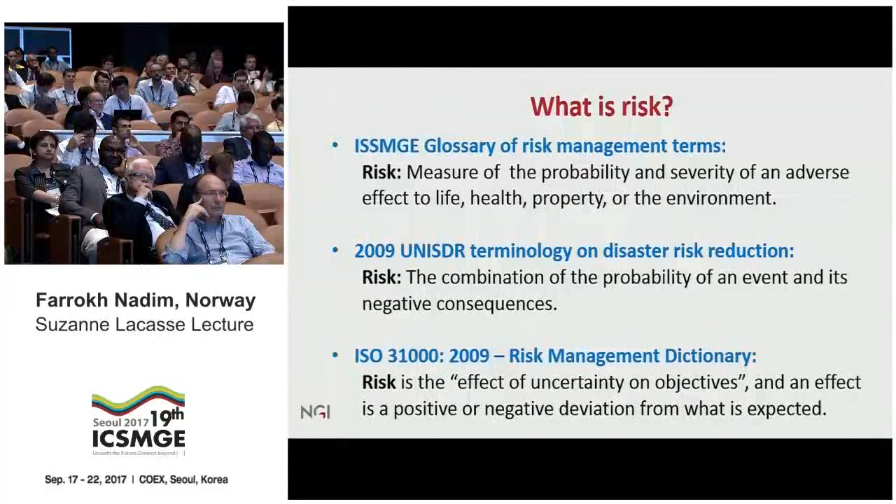What is risk? Well, risk is one of those abstract terms that many disciplines feel ownership over, so it has many different definitions in many different disciplines.

Our international society, ISSMGE, has a glossary of risk management terms, which defines risk as a measure of the probability and severity of an adverse effect to life, health, property, or environment.

In 2009, the United Nations Office for Disaster Risk Reduction came up with terminology for disaster risk reduction. In their terminology, risk is defined as a combination of the probability of an event and its negative consequences.

So it's very similar to the ISSMGE definition. But in the same year, ISO published a glossary of risk management terms, and they came up with a very interesting and kind of cryptic definition of risk.

In ISO's definition, risk is the effect of uncertainty on objectives, and an effect could be positive or negative—it's just a deviation from what you expect.

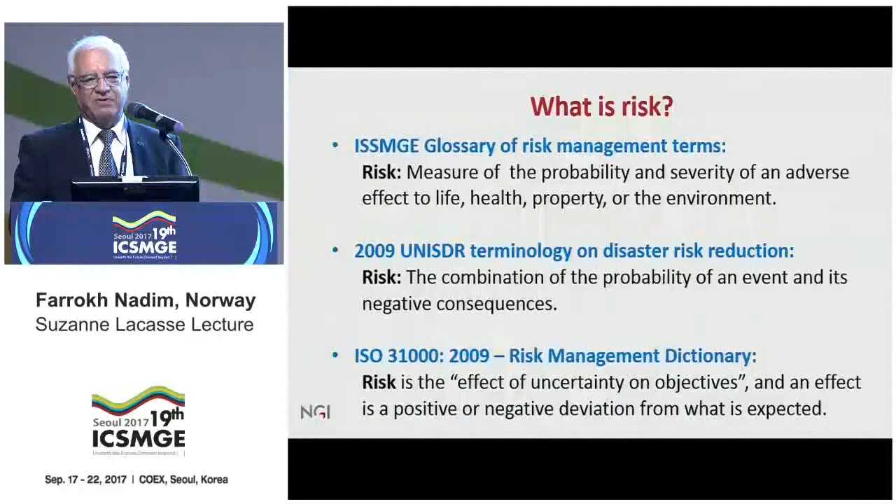I think this is a very interesting definition, and it drives home the point that if you have no uncertainty, then there's no point talking about risk. Risk is closely associated with uncertainty.

Dealing with uncertainty is kind of a day-to-day work of a geotechnical engineer. In any sort of geotechnical or geological assessment, one has to deal with uncertainty, either implicitly or explicitly.

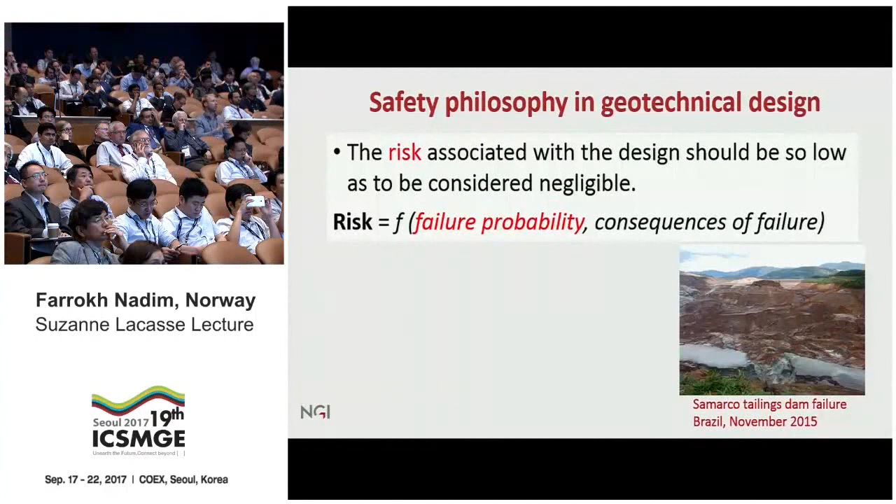When we're doing geotechnical design, no matter what design approach we use, the safety philosophy is that the risks associated with the design should be so low as to be considered negligible. As engineers, we look at risk as a function of a failure probability and the consequences of failure. So to achieve a robust and safe design, we must ensure that the probability of failure of the component or the structural system we're designing is tolerably low under the applied loads.

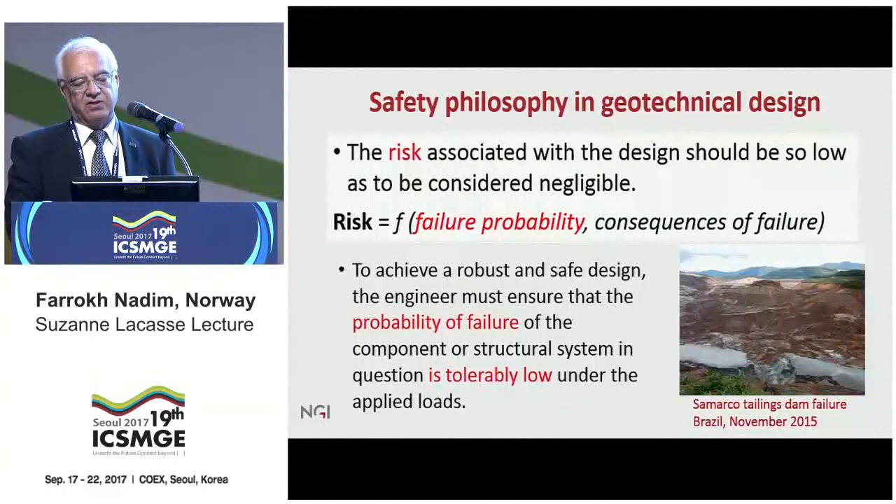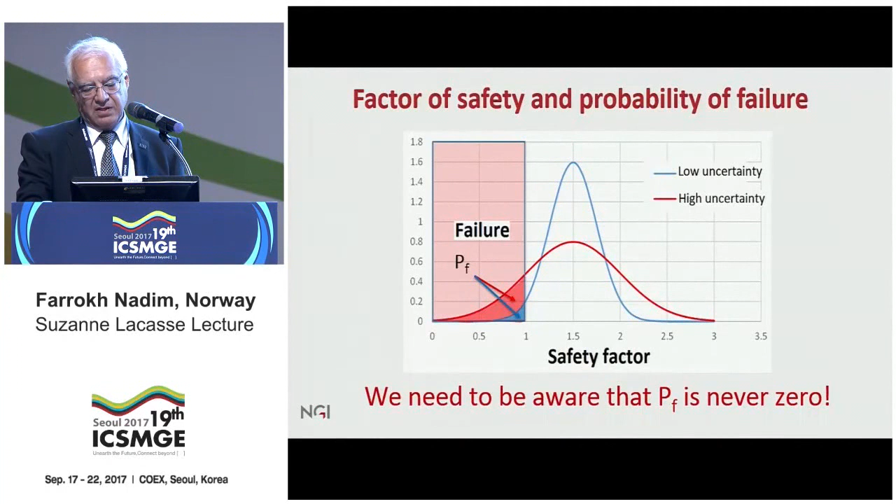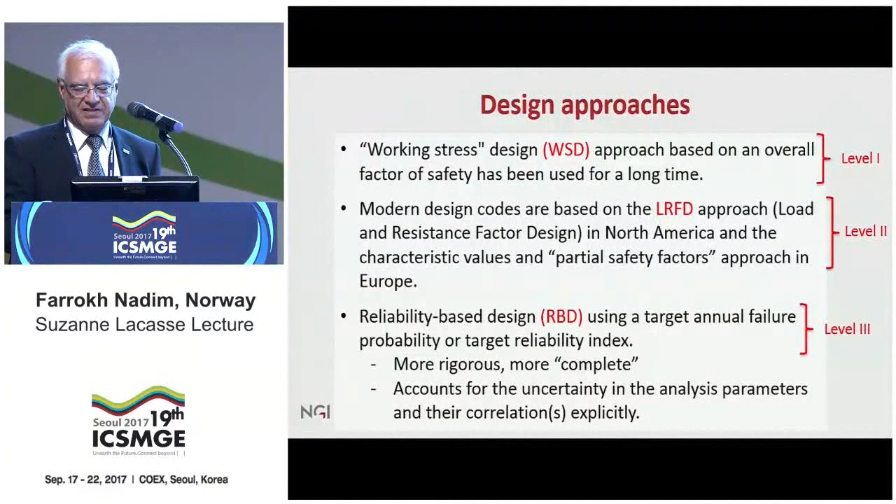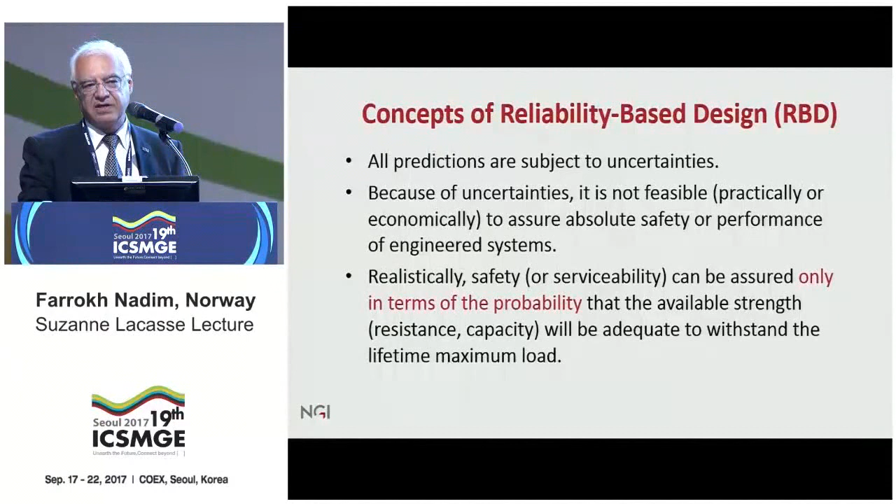The whole concept is that, as we all know, all predictions are subject to uncertainties. And because of these uncertainties, it's not practical or economical to assure absolute safety. So when we talk about safety or serviceability, we can only talk about these concepts in probabilistic terms.

So the objective of reliability-based design is to try to keep our probability of failure, which is, in simplified terms, the probability of resistance being less than the load, to be less than the target value. The design risk is quantified by this target value and failure probability, but the main challenge is that we should make a conscious choice of this target failure probability.

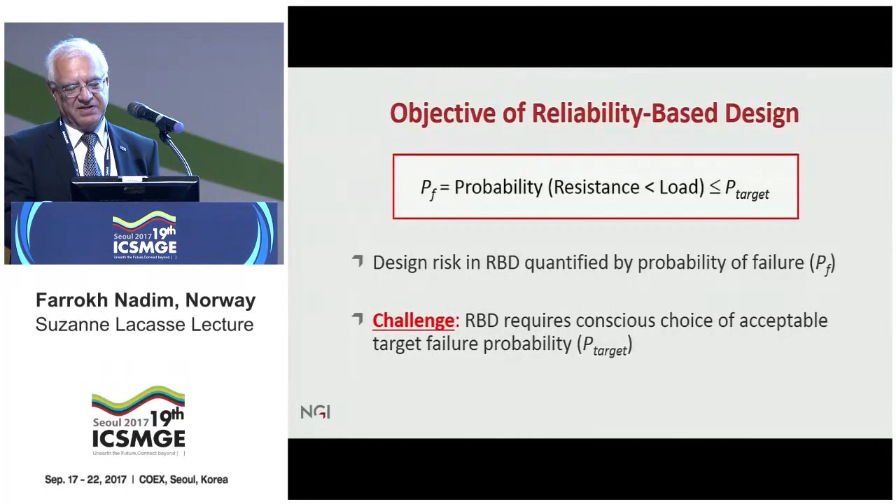Most people don't want to admit that there's any probability of failure related to their design. But if you want to do RBD, then you have to set a target value for your design.

When we're doing deterministic design, basically what we do is look at all the available soil data and then choose a characteristic soil property, characteristic soil profile. We look at all the loads, pick up characteristic loads, one specific number. Our geometry is deterministic. We feed all this information into a model, and out of the model comes a safety factor. We compare it with an acceptable safety factor.

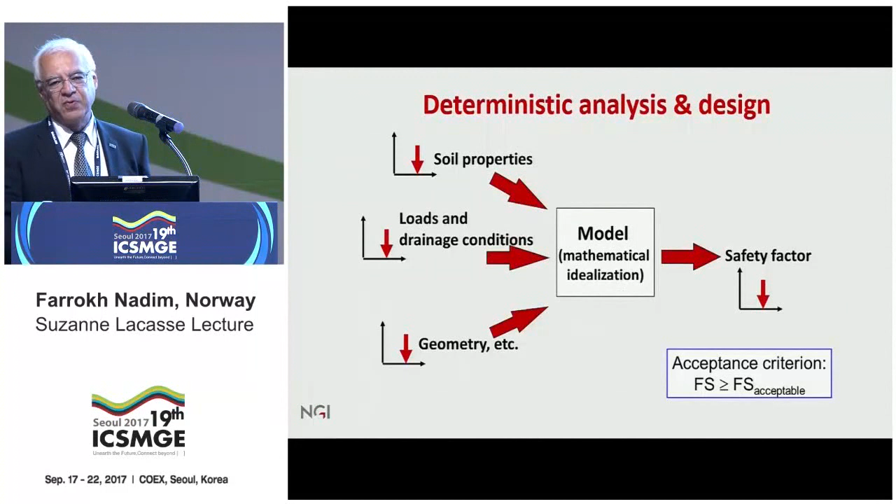If what we've calculated is greater than the acceptable safety factor, then we have a good design. So if the acceptable safety factor is 2 and you calculate 2.01, you're a hero, and if you calculate 1.99, you get fired.

A probabilistic approach is basically that you go through the same steps, but instead of picking up a characteristic profile or characteristic numbers, you describe the uncertainty in all your inputs in the form of probability distribution functions, or at least in terms of means and standard deviations.

Then you feed all these things into a model, but your model, you realize, is an idealization, a mathematical idealization, so the model also has some uncertainty in it. Out of your model comes a distribution function of a safety margin or a safety factor. And then from that, you estimate the probability of failure or the reliability index. Your acceptance criterion is that your reliability index is greater than the acceptable value, or your failure probability is less than the tolerable value.

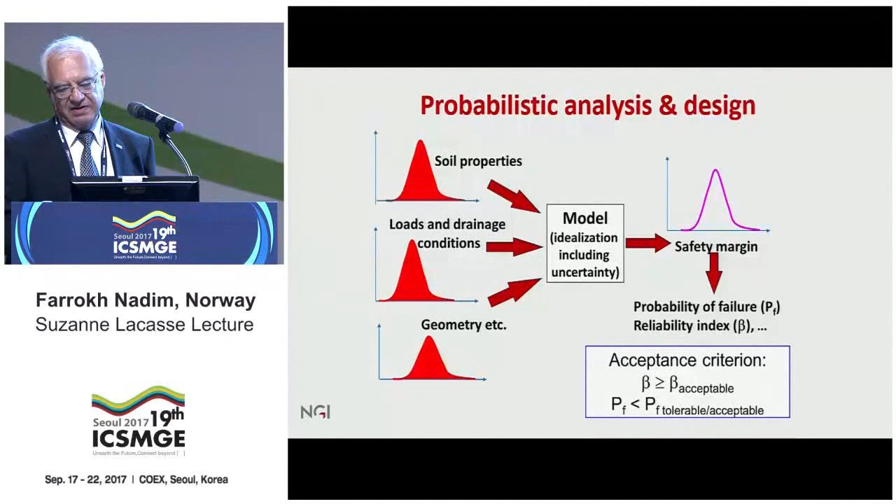So what should we do in terms of calculation of failure probability? Well, the first step is that we have to establish a precise definition of failure. Once you've done that, then you can apply a number of methods for calculating failure probability. Maybe the simplest one is the first order second moment approach, which gives you the mean and standard deviation of whatever performance measure you're interested in. Then you make an additional assumption, and from that mean and standard deviation, estimate your failure probability.

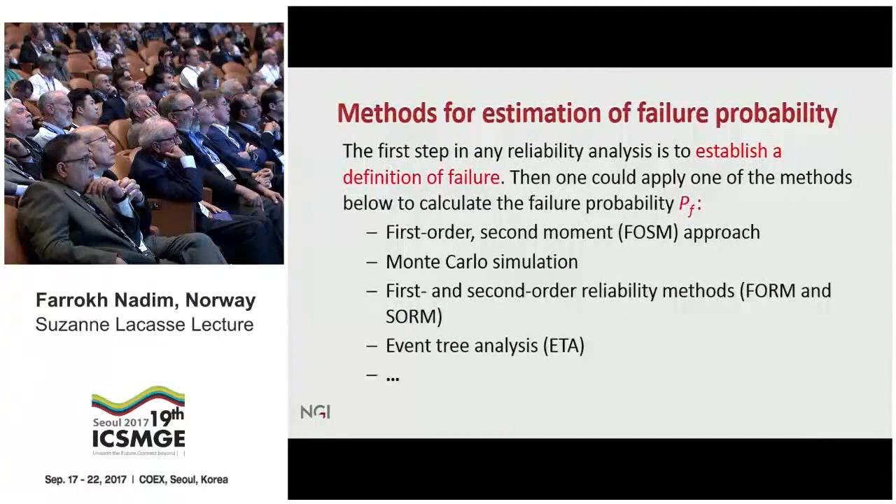Monte Carlo simulation is a sort of brute force approach that can be applied to any type of problem where you have a mechanical model for it. But it does have this disadvantage: if you're dealing with a good, robust design, you often have very small failure probabilities. So if you're dealing with a failure probability on the order of 10 to the minus 4, 10 to the minus 5, you have to do hundreds of thousands or even millions of simulations to get a good statistic to establish that failure probability.

That's why the first and second order reliability methods, so-called FORM and SORM, are becoming more and more popular. They're approximations that give you a relatively precise estimate of low probabilities. They're relatively easy to use, and they give you a lot of additional information along the way, which in many cases is more valuable than the calculated failure probability itself.

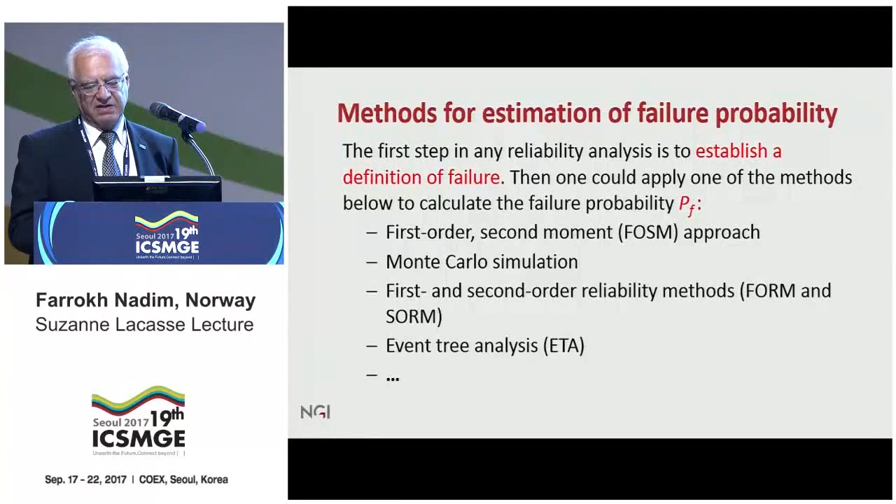In some classes of problems, we really cannot develop a precise mechanical model of the problem and assess the failure. But we can still estimate the failure probabilities through judgment and discussion with experts, and I'll give you one example where an event tree analysis approach is used. It's very popular for dam risk analysis, especially for existing dams, for tunnel risk analysis, and all types of major infrastructure you might be interested in.

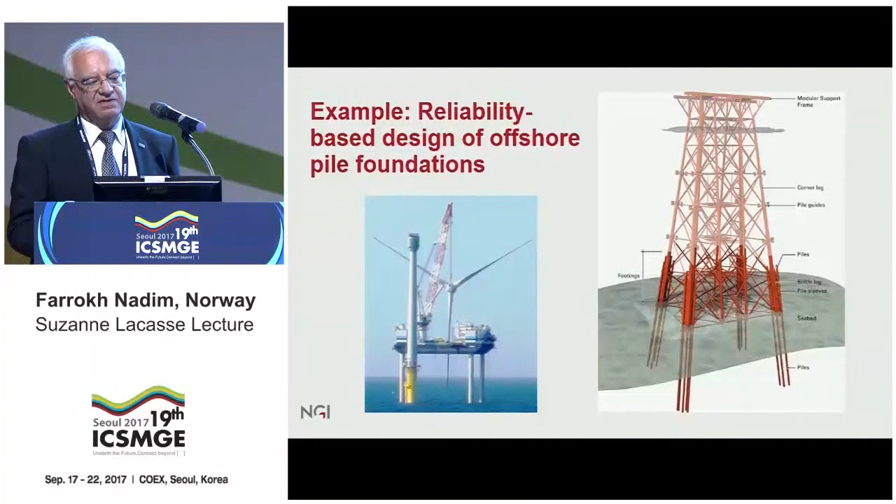So I'll give you a couple of examples of application of reliability-based design for foundations. The first example is design of offshore pile foundations. The motivation for this type of study is that recently the API and ISO guidelines for offshore design allow for the use of newer CPT-based pile capacity design methods.

And these newer methods haven't really been tested in practice over many years. So API and ISO do not tell you what sort of partial safety factor you should use when you use these methods. The only thing they say is that it's up to the engineer to select an appropriate safety factor when using these CPT-based methods. Now, this is not very helpful for a design engineer.

So in practice, you can choose to either be conservative and use a very high partial safety factor when using these methods, or you can try to assess the safety level by calculating the annual failure probability and comparing that with the goal set in these codes.

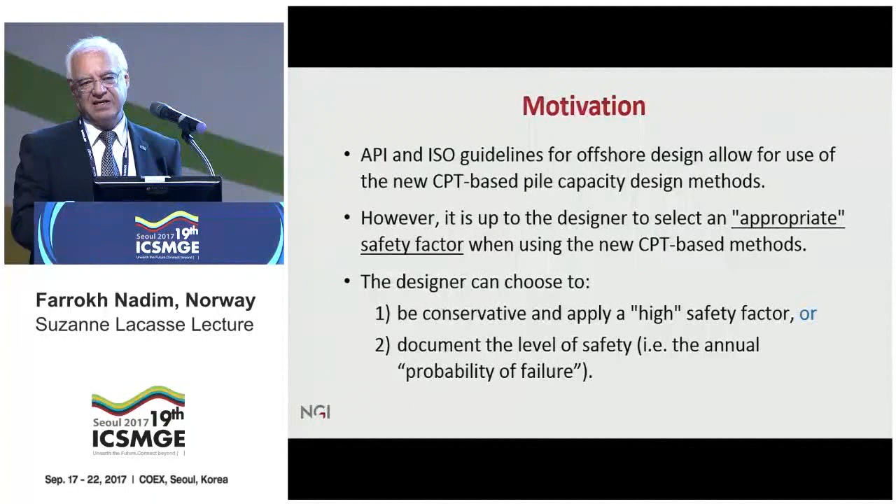We did three studies for an oil company in Norway for three different jackets that were being designed. All three jackets were in almost 100-meter water depth. The piles were similar: each pile was about 2.5 meters in diameter, and the wall thickness varied between 90 and 100 millimeters. The API and ISO codes allow for four CPT-based design methods: the Imperial College method, NGI method, UWA method, and Fugro method.

Now, if one were using the API method, then one could have used a resistance factor of 1.3. But the owner of these platforms, the operator, to make sure they have a safe design, required a resistance factor of 1.5. And that resulted in pile lengths that were, in some cases, impossible to drive through that soil profile.

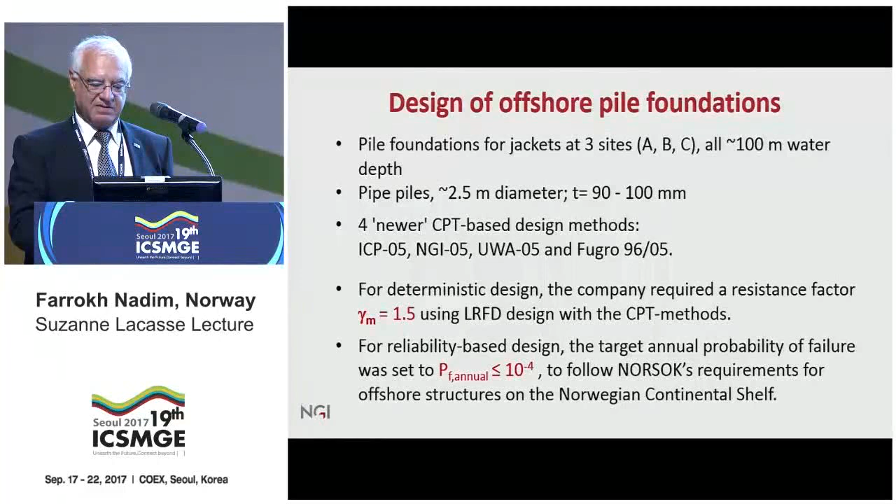So then they asked NGI to do a reliability-based assessment and find what pile length gives us an annual failure probability less than 10 to the minus 4. That value, annual failure probability less than 10 to the minus 4, is basically the Norwegian law — that's a requirement for offshore structures on the Norwegian continental shelf.

If one were doing an LRFD design, then we'd have to choose a characteristic value and characteristic load, and then apply appropriate safety factors to them and make sure that the load times the partial safety factor for load is less than the characteristic capacity divided by the partial resistance factor.

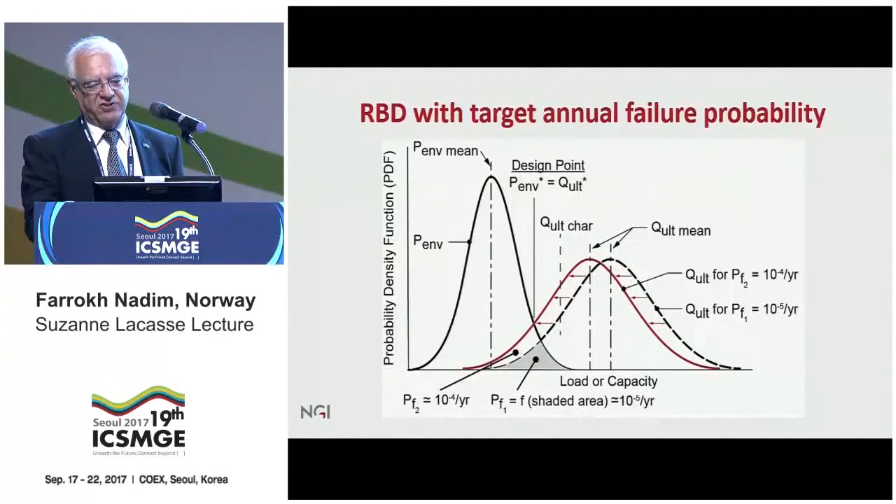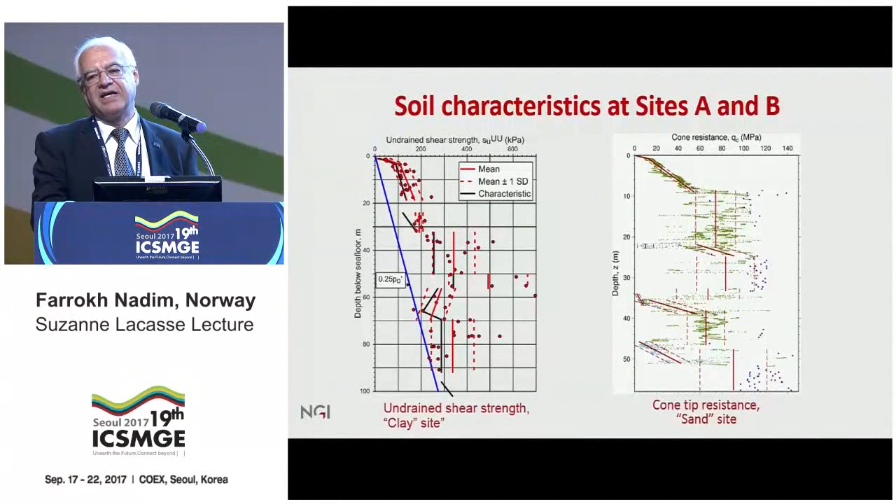So it's a heavily over-consolidated clay at the top layers at least. The one on the right shows the cone penetration resistance for the sand sites. And again, you have the mean value plus or minus one standard deviation. Notice that in some of these places you have these dots here—at these locations, the resistance was so high that the cone couldn't penetrate more, so the actual resistance is more than what's shown on that plot.

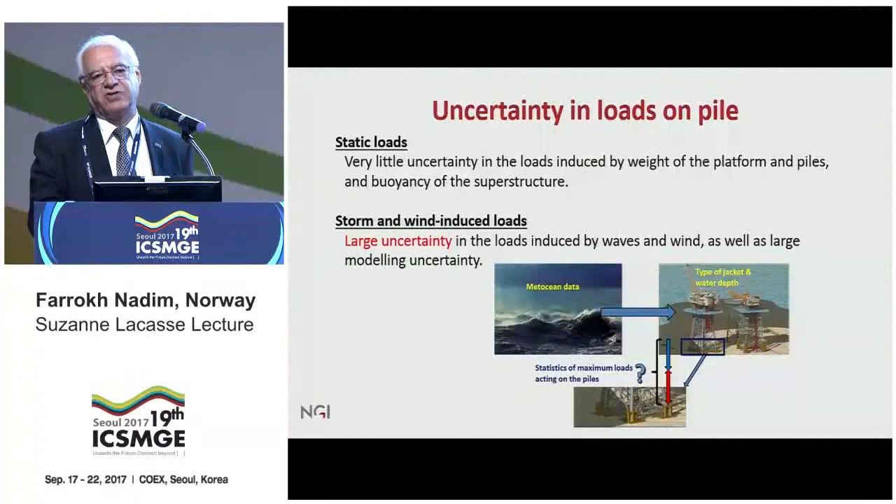But it's not just the uncertainty in the capacity which is governing this thing. When you're designing an offshore foundation, there's a very large uncertainty in the environmental loads. So it was important for us to get a good grip on the uncertainty in the environmental loads that come into the picture too. And for that, it forced us to have a very close dialogue with the structural engineers and the hydrodynamic experts.

But just to make a long story short, by doing this reliability-based design with the target of having the probability of failure less than 10 to the minus 4, in the clay sites, the pile lengths were reduced from 90 meters to 75 meters. In the sand sites, they were reduced from 51 to 27 meters. And in the mixed site, from 45 to 36 meters. So this represented huge savings—close to maybe millions of dollars at each of these locations.

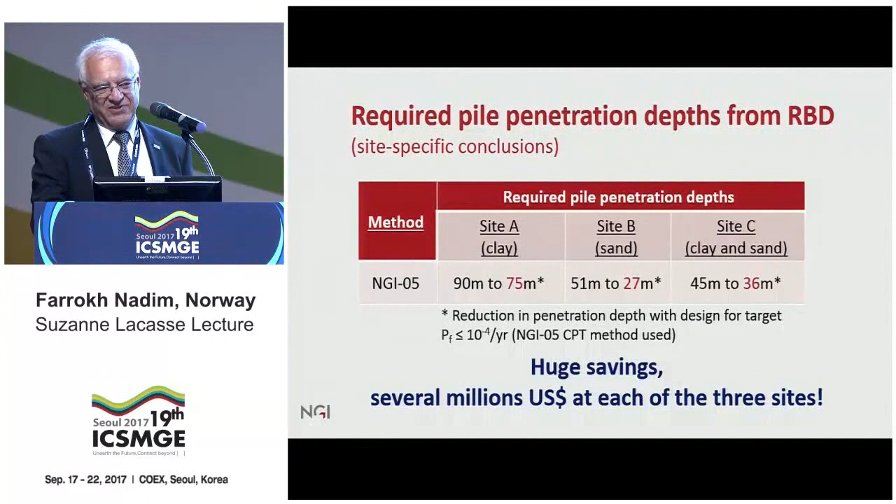Of course, our client was very happy to accept these results because it meant huge savings for him. But if we were coming up with the opposite conclusion, if the reliability-based design was giving us pile lengths that were longer than the deterministic design, I'm pretty sure they would have ignored our calculations completely and just said, okay, we're happy with the deterministic design.

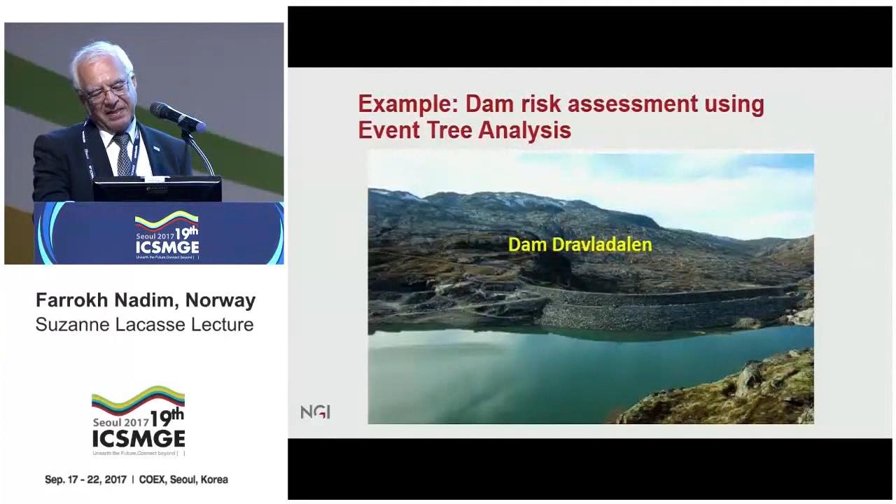Second example I'm going to give you is from a dam risk assessment using event tree analysis. The dam is actually only 29 meters, not a very large dam. It's a rock-fill dam in western Norway called Dravladalen, so it's not very easy to pronounce either. But it's a very interesting case study.

So in terms of stability and issues with stability of the dam under different loading conditions, this is a very robust and safe dam.

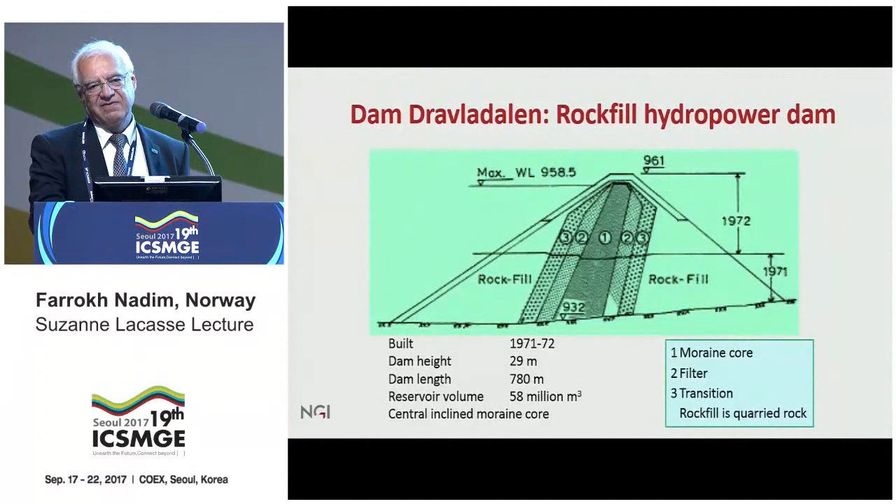But when we did the reliability analysis of this dam in 1996, the reason the owners of the dam wanted to do it was that there was a lot of interest in dam risk analysis in those days. They wanted to acquire knowledge about what additional information, what sort of added value can be gained by doing this sort of dam risk analysis.

Then we redid this same dam in 2016, because for about 15 years there was absolutely no interest in this. But again, in the last couple of years, there's been a lot of interest by dam owners in Norway and also in US and Canada and other places in doing dam risk analysis.

The reason they did it in 2016 was this renewed interest, but in the meanwhile, from '96 to 2016, they had done a number of rehabilitations on these dams, so they wanted to quantify the effect of these rehabilitations. The dam owner also wanted to compare the reliability of the dam with international standards for other large dams in the world.

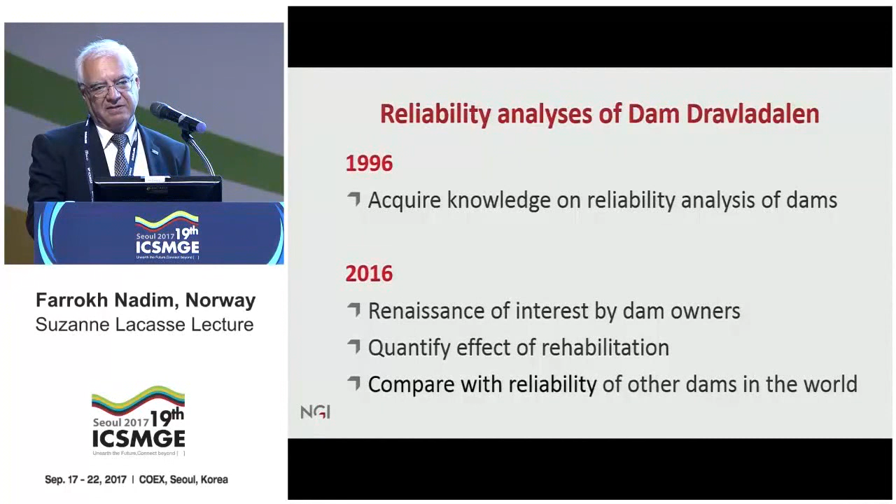Event tree analysis is a graphical method that goes through a scenario of 'what happens if' type of analysis. Usually you start with some triggering factor, for example an earthquake, and then you see how that initiating event could lead into a series of steps that could ultimately lead to dam failure.

Now, there are certain rules one has to follow in this sort of event tree analysis. The main rule is that whenever you branch out, the events you define should be mutually exclusive and collectively exhaustive. That's a fancy term, but basically means they have to cover all possible cases and cannot have any overlap. So the sum of the probabilities of these branches should always add up to 1.

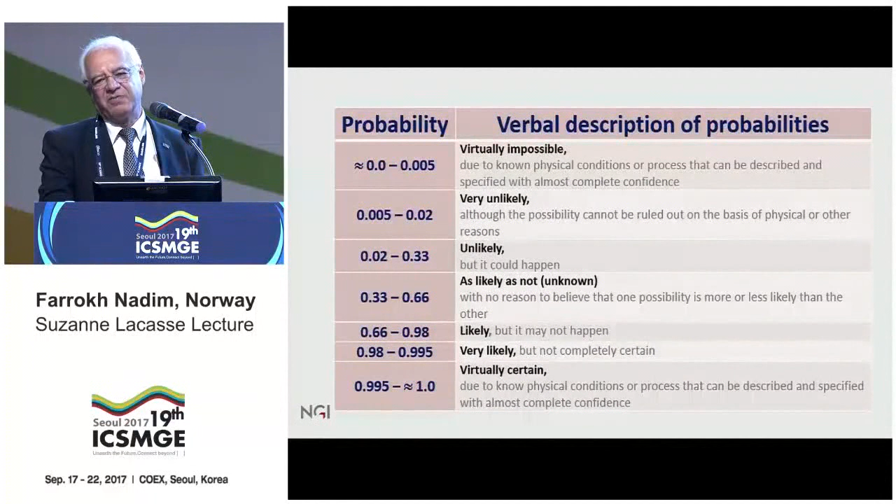This also allows us that when we finish with the event tree, we can convert it into a Bayesian tree and go through a Monte Carlo simulation and get a range of the failure probabilities. So instead of ending up with one number, we end up with a range of probability of the probabilities.

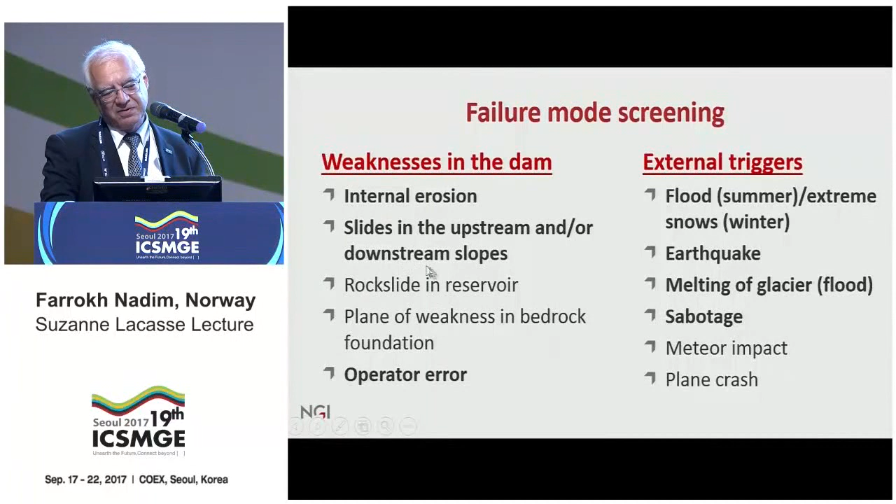Now, when we looked at this dam in 1996, we looked at 2 sets of scenarios. One set was weaknesses in the dam, things like internal erosion, slides in upstream or downstream, operator error, and also a set of external triggers. When you go through this event tree, you have to first go through whatever scenario comes to your head. So we also thought about meteor impact, plane crash, nothing is too exotic. But then you have to choose which one of them you want to use your time on in the workshop. So the ones that are shown in bold here, these are the ones that were actually analyzed in the workshop.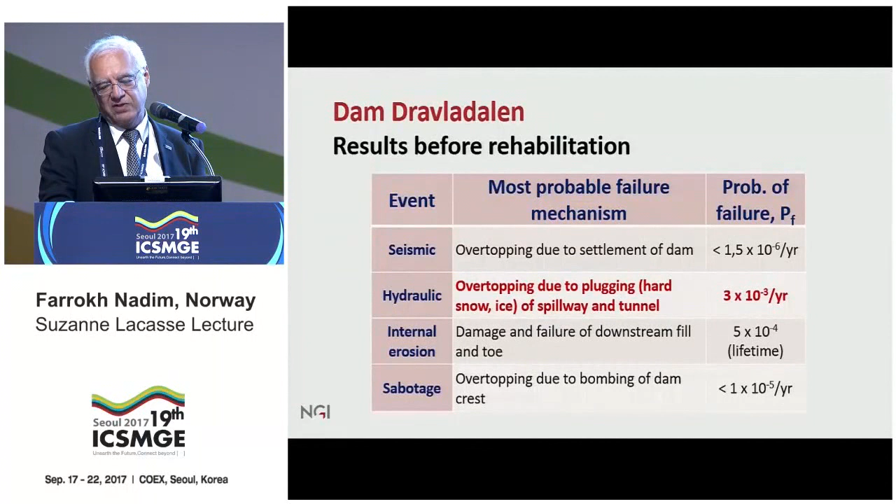So when we went through those inventories, the one that came up with the highest annual failure probability was this event here with overtopping due to clogging of the spillway and tunnel with hard snow and ice. And that gave an annual failure probability of more than 10 to the minus 3. This is not acceptable by any international standard. When your dam is a very important structure, the consequences of failure are very large, so you would like that number to be definitely less than 10 to the minus 4 per year.

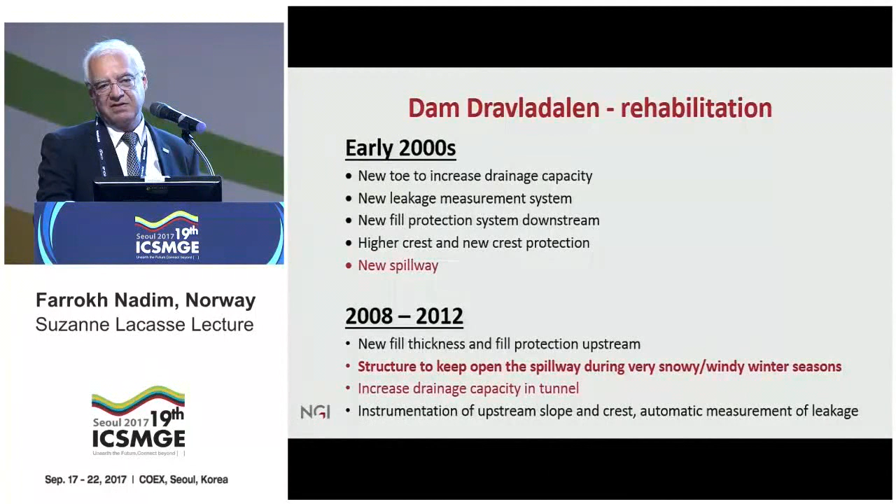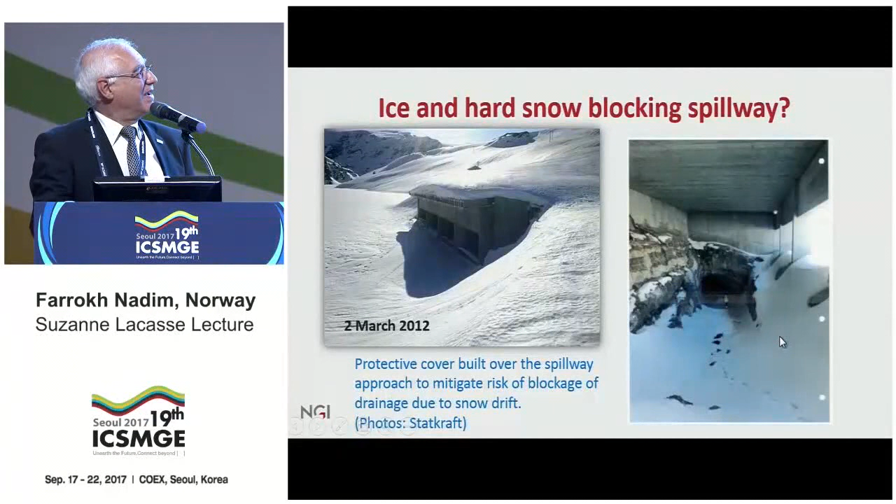So they did a series of rehabilitations, and among those was building a new spillway, and they also built a structure to keep the spillway open during the snowy and windy winter season. This didn't cost that much, maybe a couple of $100,000, which is really not that much money for this type of structure. But it was very effective. This is a picture of the same place in March 2012. Now you have this structure covering the entrance to the spillway, and you can see the entrance to the tunnel here. For scale, we have a Norwegian standing here, so he's about 2 meters. It's typical Norwegian height. So you can imagine that this thing is going to function quite well.

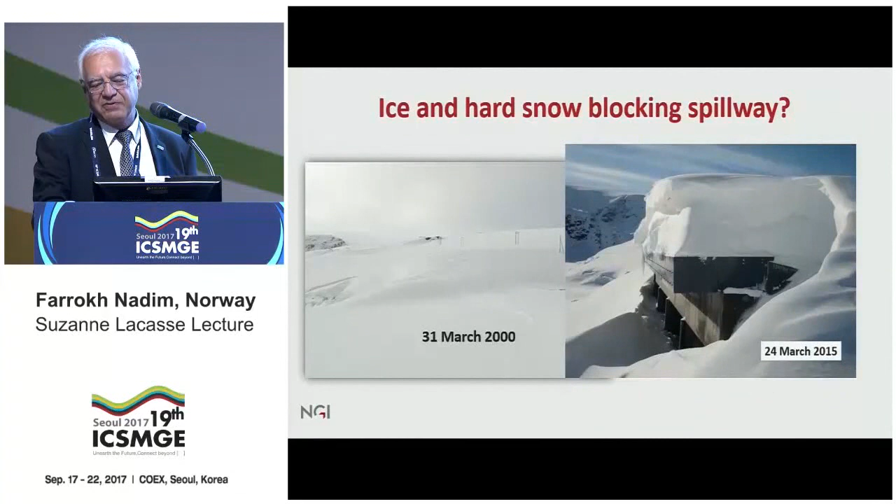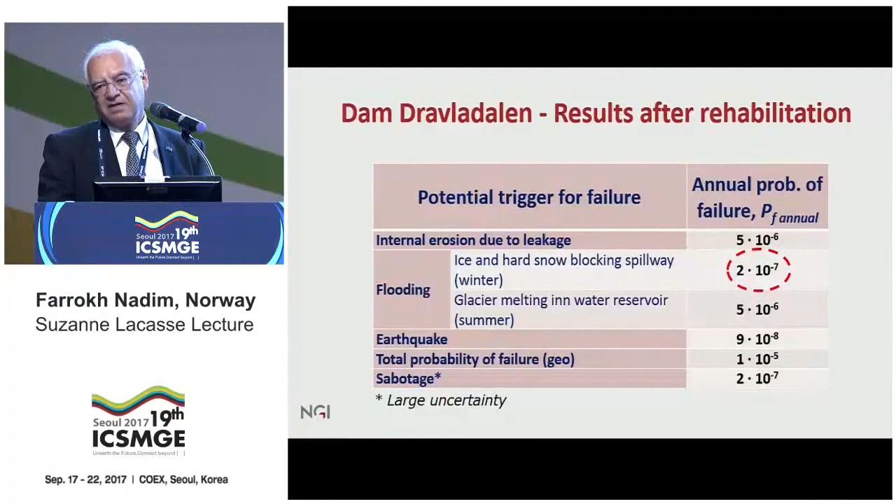And again, this picture that you saw from end of March 2000; 2015 was also a very harsh winter, and this is what it looked like in 2015. We redid the risk assessment last year for this dam, and the number that you saw, 3 times 10 to the minus 3, is now 2 times 10 to the minus 7. So just by identifying that critical failure mode and then making a relatively minor investment, we managed to basically eliminate that as a critical failure mode for this dam.

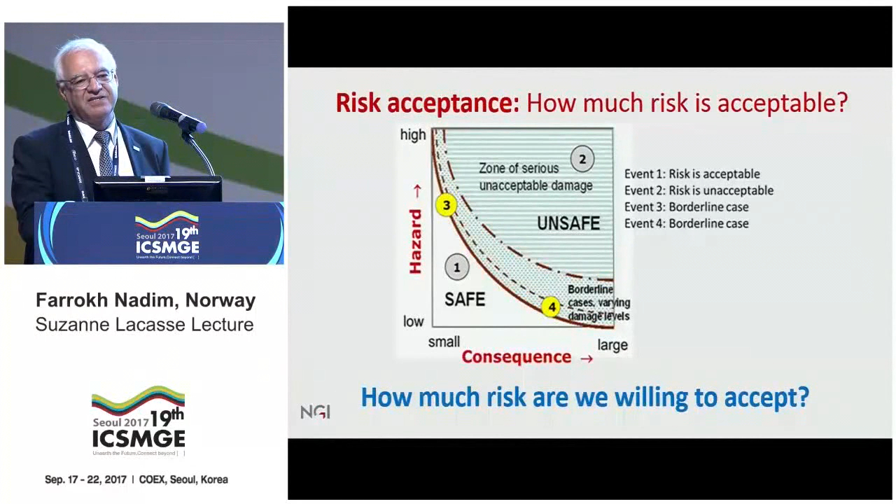But also an associated question with how much risk is acceptable is how much risk are we willing to accept. And that depends very much if the event is voluntary or if it's imposed. In voluntary activities, people are willing to expose themselves to extremely high risks. But if it's imposed by an external agent, then the tolerance goes down quite a bit.

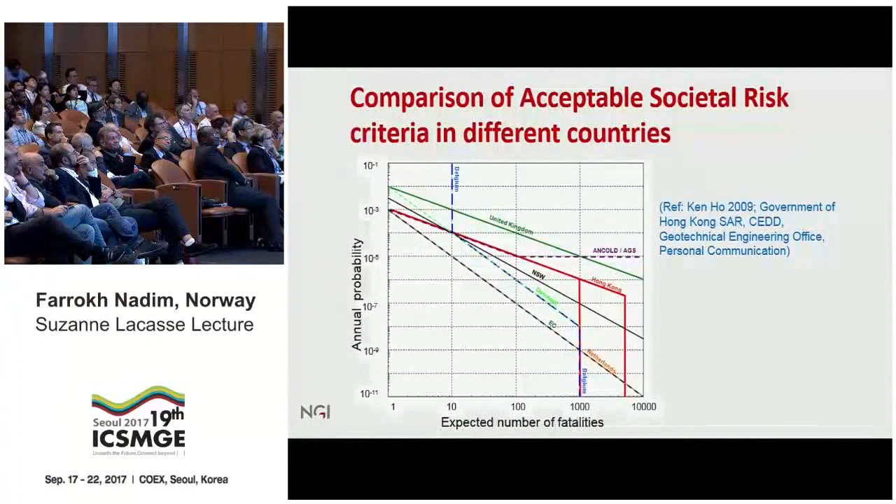And some of these criteria, when you plot them on this scale, they look a little bit strange. For example, it seems that in Belgium, if an event kills less than 10 people, it's acceptable. But that's not what it's meant. That's because in that code, they define disaster as some event that kills more than 10 people. So,

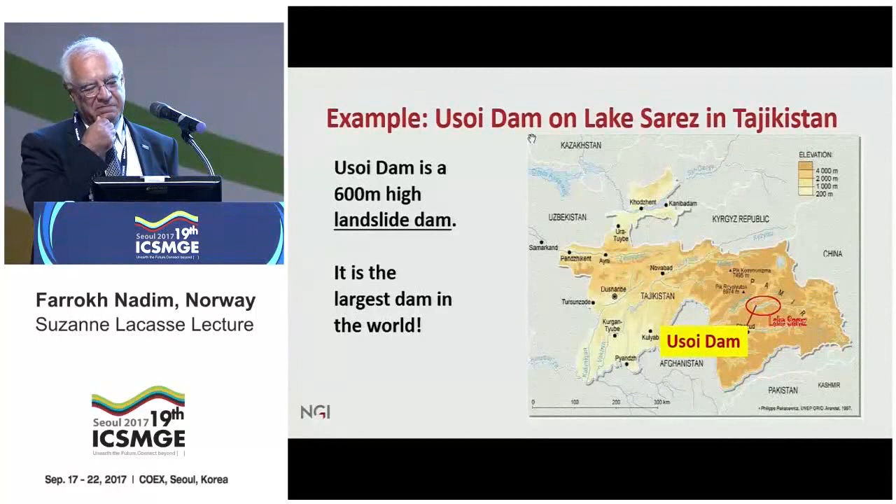but I'll show you an example of how that sort of risk acceptability criteria can guide us in designing some mitigation measures. The example that I chose here is Usoi Dam on Lake Sarez in Tajikistan. Even though Usoi Dam is the highest dam in the world, very few people have heard about it. I think even here among the geotechnical engineers, I would be surprised if more than 1% of you have heard of this Usoi Dam. And the reason is that it's not an engineered dam.

It was created in 1911 by a large earthquake, which caused a massive rock slide that blocked the flow of the Murghab River. And these landslide-created dams, they're very dangerous. About 99% of them fail within 1 year. But this one was so massive that even after 100 years, it's still there, and there's no question of this thing failing.

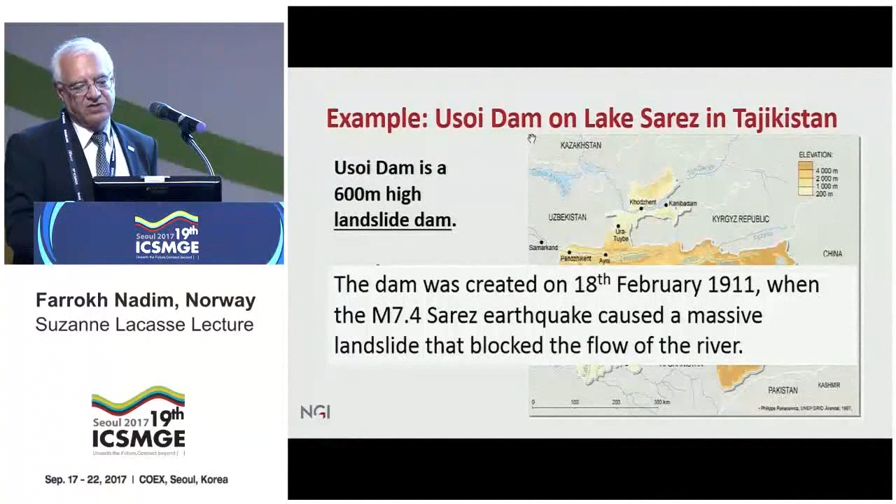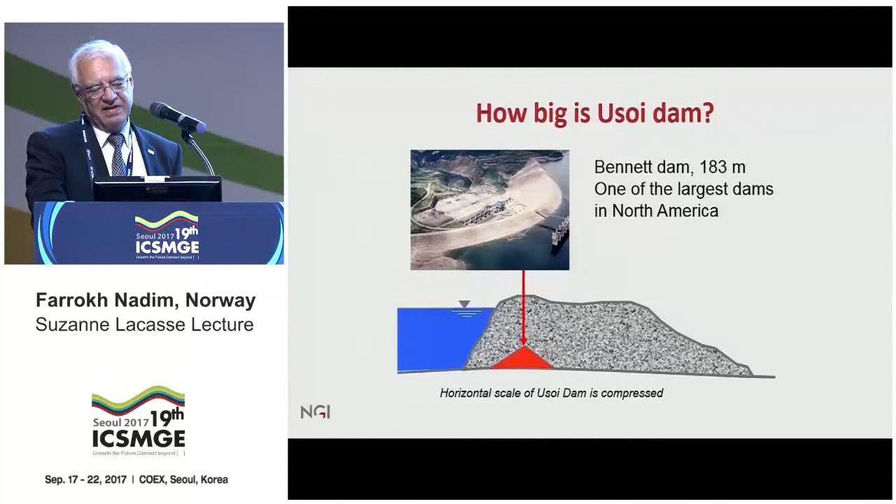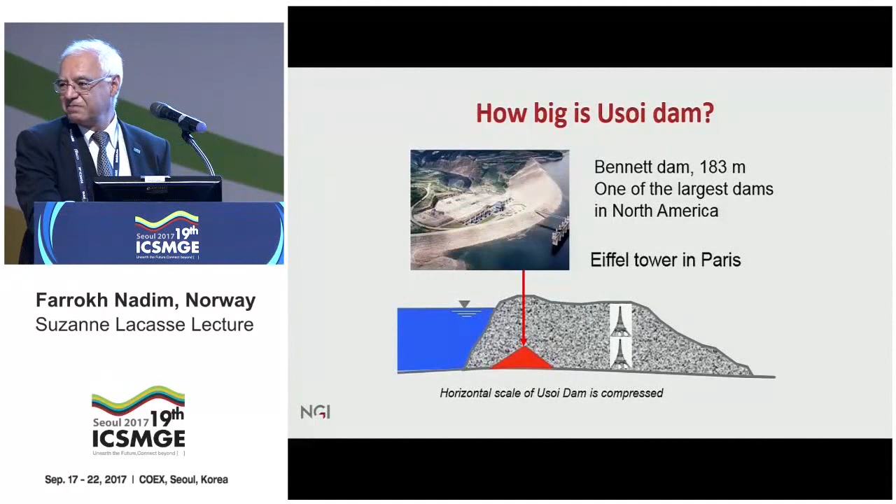Just to show you how big it is, the Bennett Dam is one of the largest dams in North America. It used to be the largest one, but I think now it's number 3. It's about 180 meters high. If you take the Bennett Dam and put it inside the Usoi Dam, this is what it looks like. And I guess you all have a concept of how high the Eiffel Tower is. You can easily fit 2 Eiffel Towers within the Usoi Dam. So the dam itself is huge.

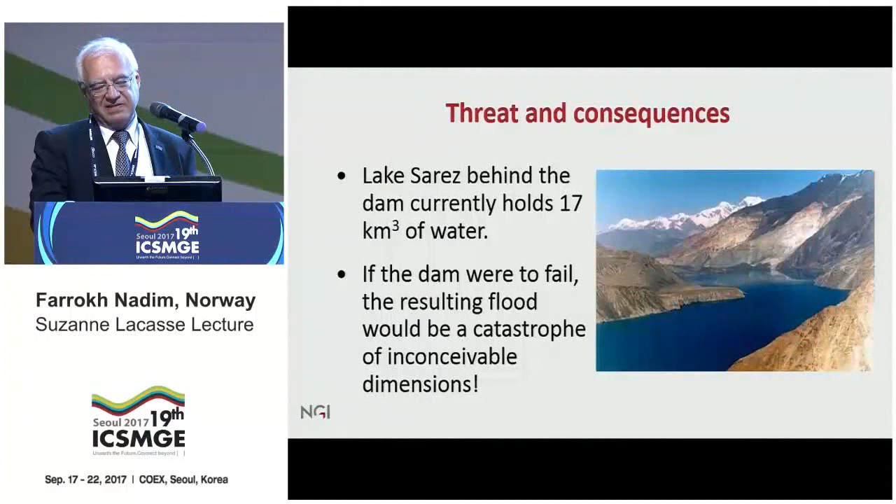But the problem is that there's no spillway. The water has nowhere to go. So water has been impounding behind this dam for over 100 years. And right now, the lake that's created there, Lake Sarez, holds about 17 cubic kilometers of water. So if this dam were to fail, the resulting flood would be one of those catastrophes that is really inconceivable. There have been a number of studies in recent years on the safety of this dam and different disaster scenarios.

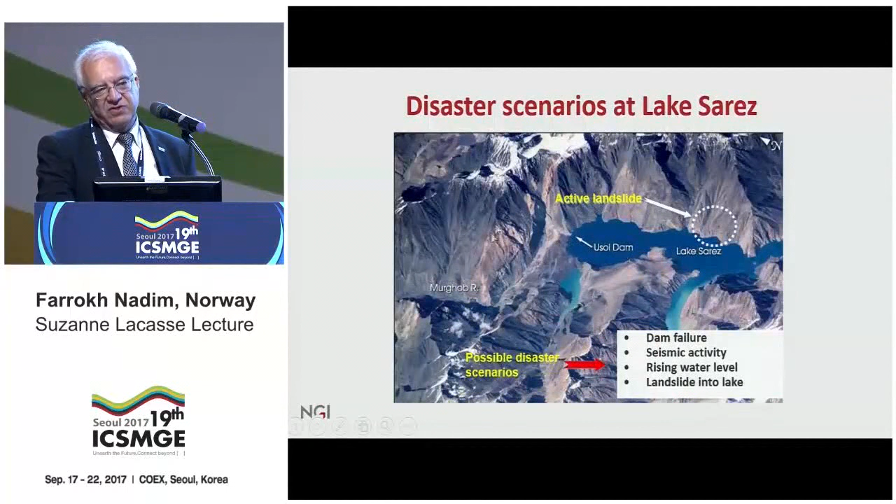The most realistic disaster scenario is that there's an active landslide on the right bank of the lake. And that's moving at the rate of a couple of centimeters a year. If suddenly this landslide fails catastrophically into this lake, it would create an impact wave or a tsunami that would overtop the dam, and that flood would kill many people downstream. So this is more or less the boundary of the landslide. It's about 2 kilometers wide and about 800 meters high.

There's a group that did a quantitative risk assessment for this scenario. Their assessment was that the annual probability of that event happening was about 10⁻⁴. Remember that this is a very seismically active area, so the most likely trigger would be a big earthquake like the one that created the Usoi Dam to begin with. And if it happens, the resulting flood could potentially kill about 3,000 to 4,000 people downstream. If you plot that on this plot of acceptable risk criteria, it falls outside everything that's acceptable.

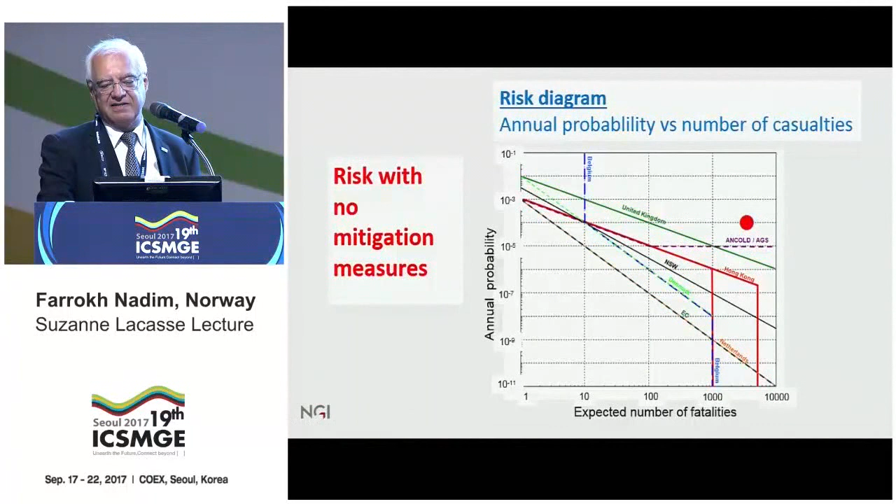You can see the early warning system doesn't do anything with the hazard. The annual probability is still the same. What it does is that it moves people out of the harm's way. So you're moving horizontally on this axis. You can say now we have a situation which may be marginally acceptable, but still we would like to have it lower. The next step would be to do something on the vertical scale, to drop this point down.

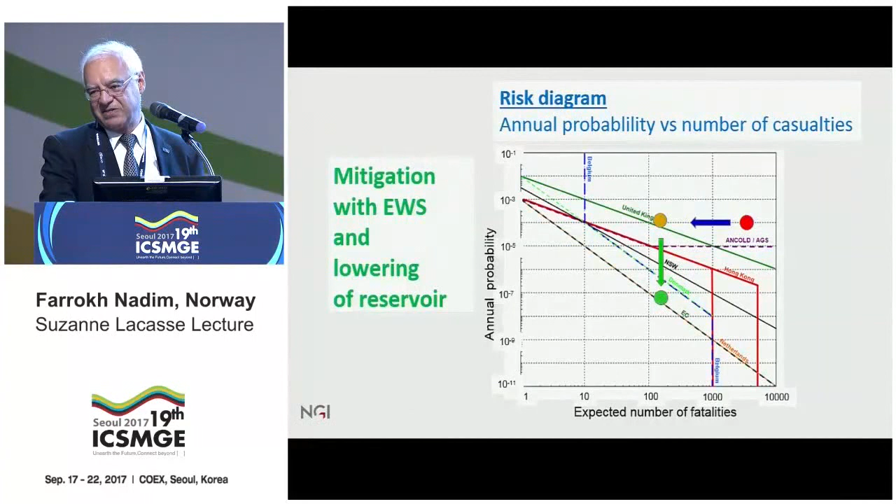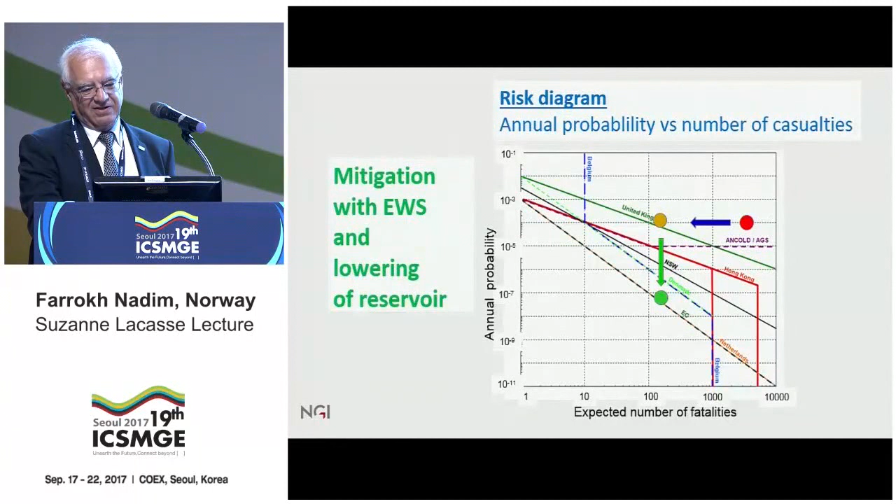And the thing that can be done is to build a tunnel there to reduce the level of the water in the reservoir. If that is done, then you would come to this green spot here, and we can say, okay, now the risk is so low that we can forget about it. Unfortunately, the early warning system has been installed, but the building of the tunnel, I doubt very much it would ever be realized, because it costs a lot of money, and the area is very inaccessible, and Tajikistan has a lot of financial problems, and this is not the highest on the priority.

Now, some challenges. We talked about quantitative risk assessment and the acceptable risk concept. I think that's all nice and fine as long as we're dealing in this part of the curve. Once we get to these extreme events, which have a very low probability but very high consequence, so-called extreme events, we're really dealing with a mathematical problem, which is 0 times infinity, very ill-behaved.

And the question is, can we really calculate probabilities of 10 to the minus 9, 10 to the minus 10 per year? Just remember, Earth is only 4 billion years old. So something that is 10 to the minus 10 per year hasn't had a chance to happen yet during the whole Earth's lifetime. So if we end up here, maybe we need a new approach, a different approach to the problem.

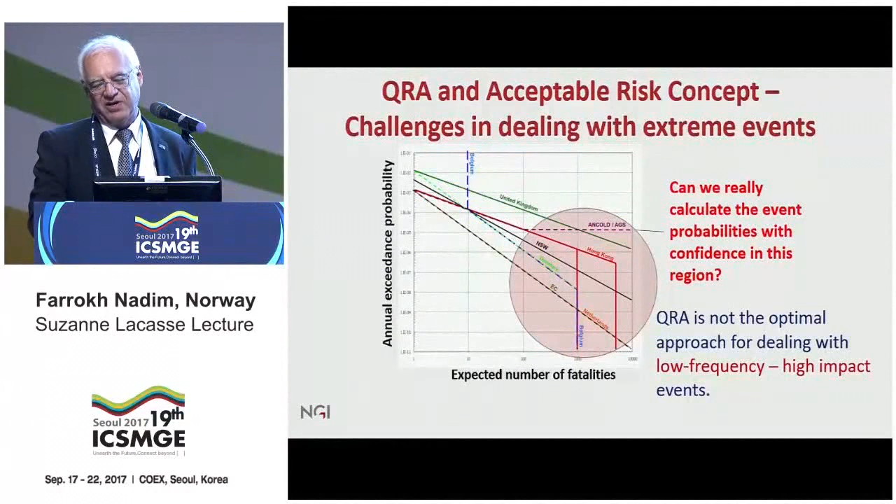So in recent years, people are increasingly realizing that quantitative risk assessment and reliability-based design go quite a long way for traditional engineering problems, but are maybe not ideal for dealing with low-frequency, high-impact events.

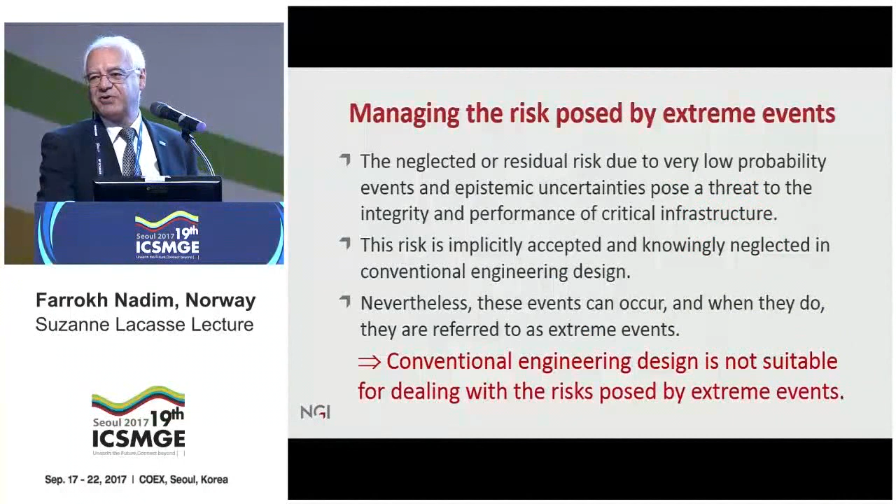Since I'm running out of time and you're probably worried about your gala dinner, I'll try to go quickly.

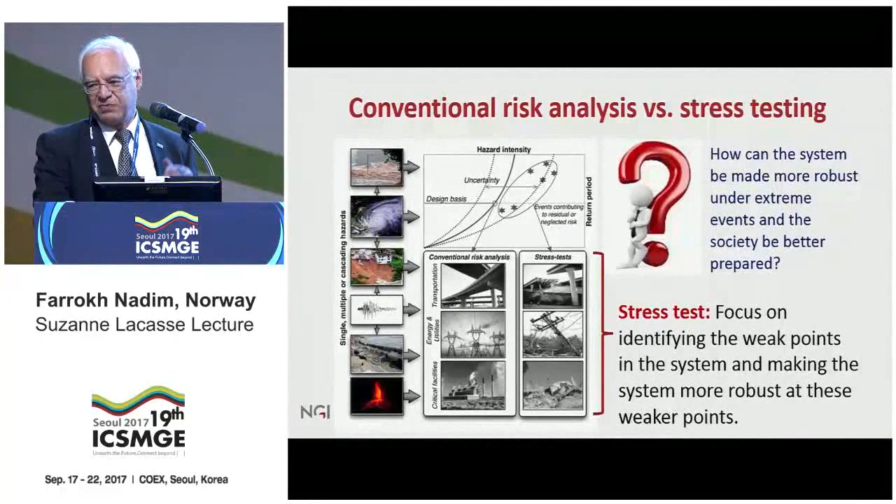What's coming up now is stress testing. The focus of stress testing is not on calculating these low probabilities, but on the system performance and identifying where the weaknesses in the system are, and how we can make the system more robust. For example, for the dam I showed you, through the event tree analysis we identified the weakness of that system was the entrance to the spillway tunnel being covered by snow, and then we could build that cover to make it more robust.

After the Great East Japan earthquake in 2011, the West European nuclear regulatory agencies required stress testing of all nuclear power plants in Europe. And in terms of geotechnical engineering, Limin Zhang and his colleagues have proposed a framework for doing stress testing for the Hong Kong slope safety system, and I think it's a very interesting paper.

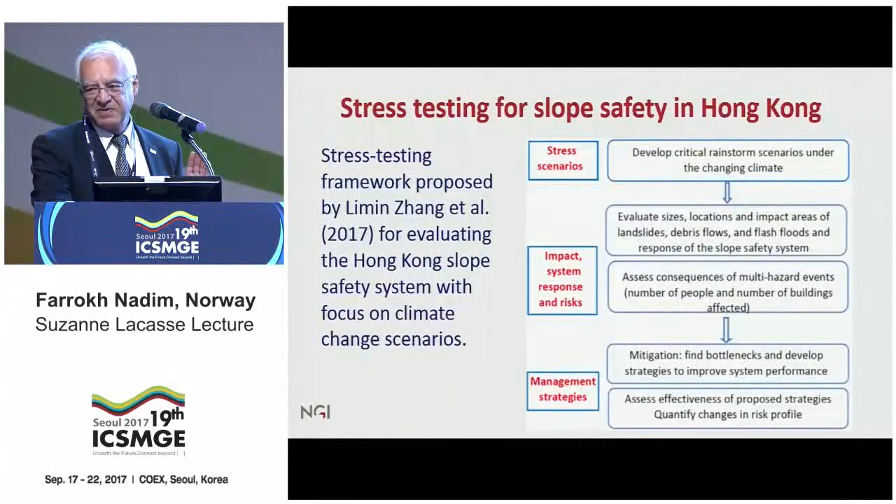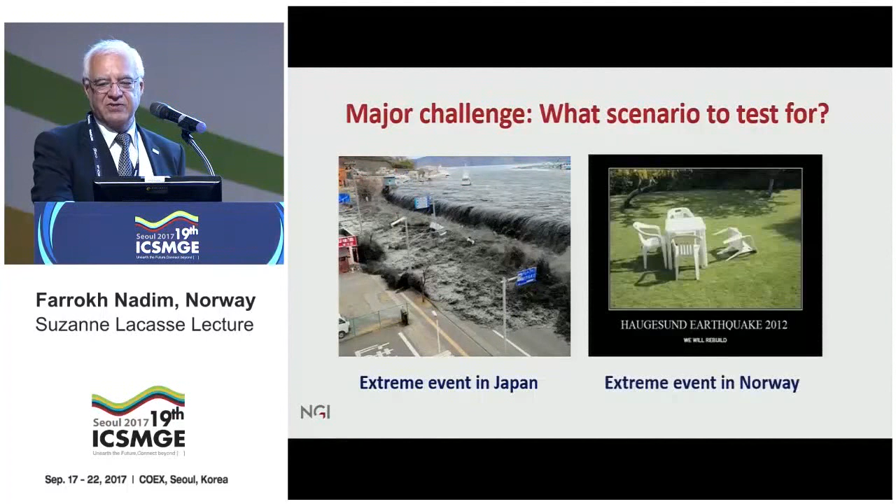If you go through these steps here, you can see that nowhere in these steps does he talk about any probabilities. The focus is on the system, where the weaknesses in the system are, what we can do to make the system more robust. But there are challenges, major challenges. What scenarios do you test for? If you're testing for an earthquake scenario in Japan, this is maybe the extreme event you test for. If you're testing for an earthquake event in Norway, maybe this is the event you test for.

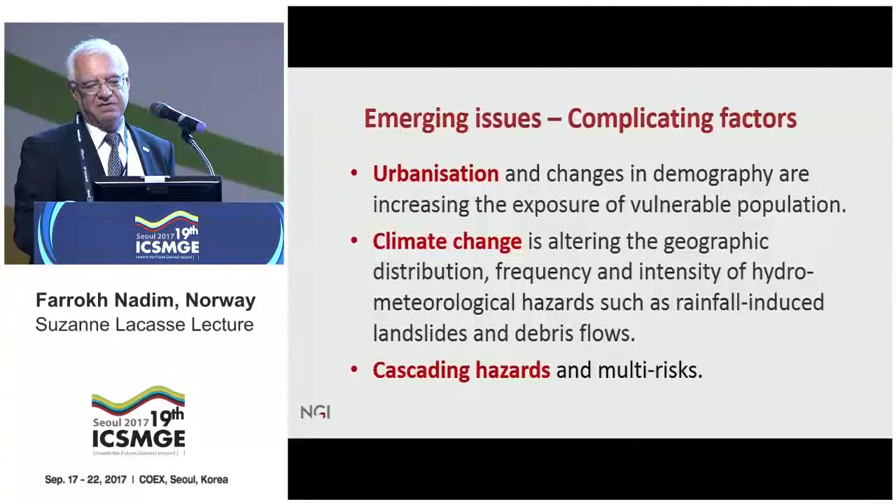There are also some complicating factors and emerging issues. Urbanization and changes in demography are increasing the exposure of population in urban areas. Climate change is changing the geographical distribution, frequency and intensity of events like landslides, floods, and so on. And cascading hazards, multi-risks, and combinations of natural hazards and industrial events, like the one we had in Japan, a big earthquake leading to a tsunami, leading to an accident in a nuclear power plant. These are issues which are challenging but very interesting, and this is the way research is going.

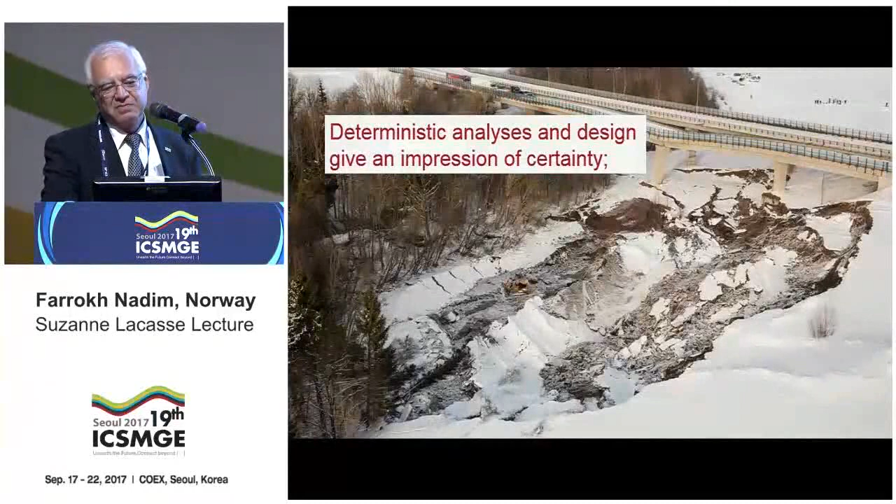So, in conclusion, deterministic analysis and design give an impression of certainty. Probabilistic analysis and reliability-based design complete the picture by making explicit the uncertainties and their effects. And for robust geotechnical design, we need both.